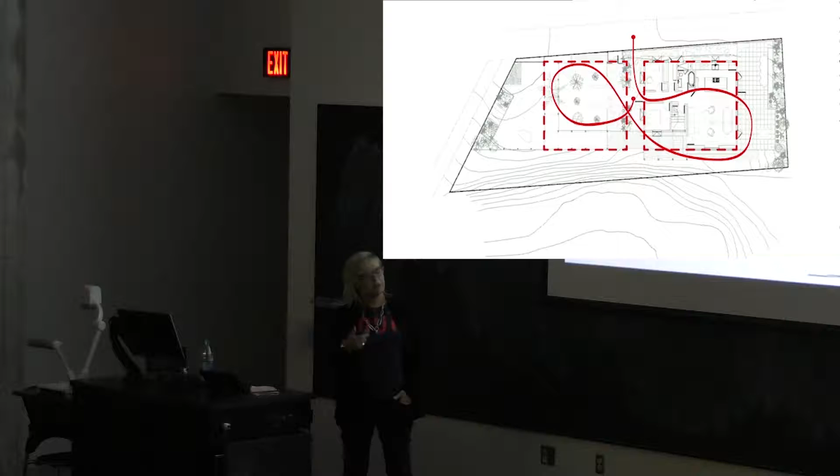That project got published a lot. It was weird, in the end I thought of it as just kind of a side project, but it ended up getting me this book deal to do a book on what I'd call the suppressed narrative of modernism in LA, which to me was these very eccentric endeavors by people like Gregory Ain or Schindler.

Or Neutra, that were a little bit about LA and some of the issues that Todd was talking about, but also about the clientele, which in the neighborhood this book is about, Silverlake, were often people working in the movie business. It was kind of a less segregated area, more politically left.

Anyhow, I think I did this in 2004, and it was a time when people still thought of modern architecture in a more antiseptic way, kind of a glass, steel, Wassily chair kind of way. So I wanted to show this illustration of these other versions of modernism.

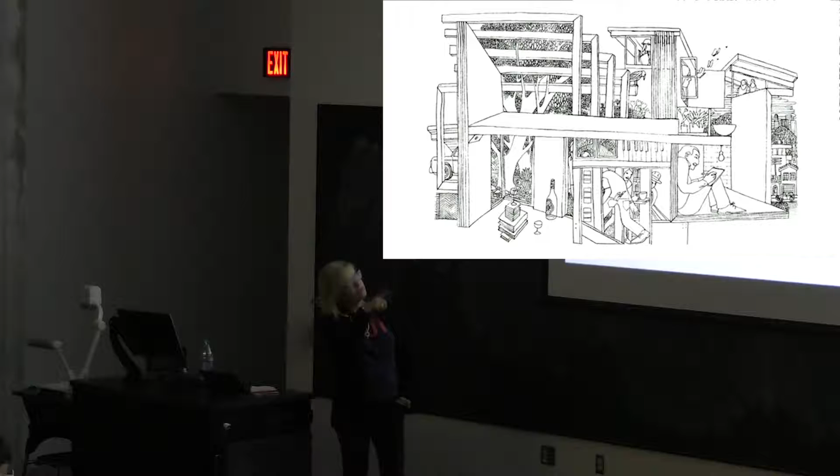A friend of mine, Geoff McFetridge, who's a kind of renowned graphic artist and artist, did illustrations. So this is his illustration of the Schindler chapter. That's Schindler in the corner drawing.

And the book itself was intentionally laid out as a different kind of project than like a Swiss modernist monograph about architecture. So I worked with this guy, Michael Worthington, who's at CalArts, and we developed this sort of graphic language and a more informal way of presenting it.

So all the houses are photographed kind of with the stuff in them as it is, ersatz.

And in a way, that kind of speaks to what has since become an issue for me, which is looking at diverse sources of inspiration. I'm particularly interested in strategies that are two-dimensional strategies like color or text that can add a lot of atmosphere to a building without that much cost.

So it's kind of like a third layer of architecture, and I see things like the history of informal painting on buildings. This is an artist working on a project about that same issue, but kind of the palette of LA as it was when I moved there.

Right now, LA is very influenced by stuff going on in Vietnam and China, but funnily, for LA right now, all the architects, all we ever do is talk about Mexico City. Mexico City is the cool place to be. If you want to go somewhere cool, you can skip LA apparently and go to Mexico City, but there is a kind of new emphasis on color.

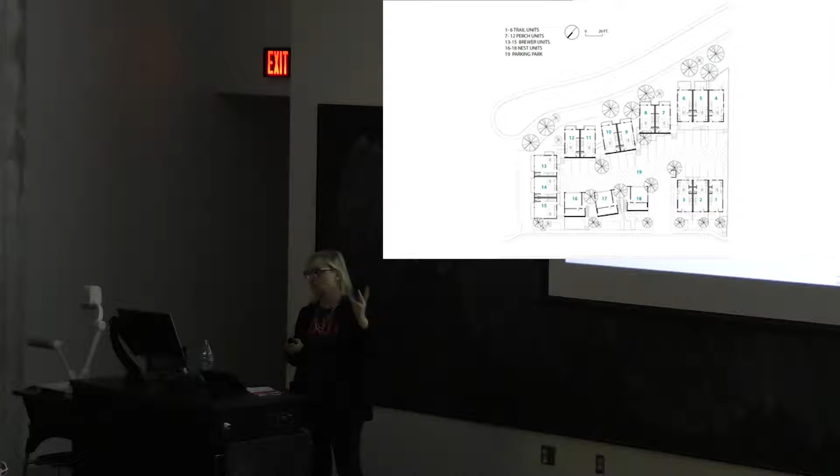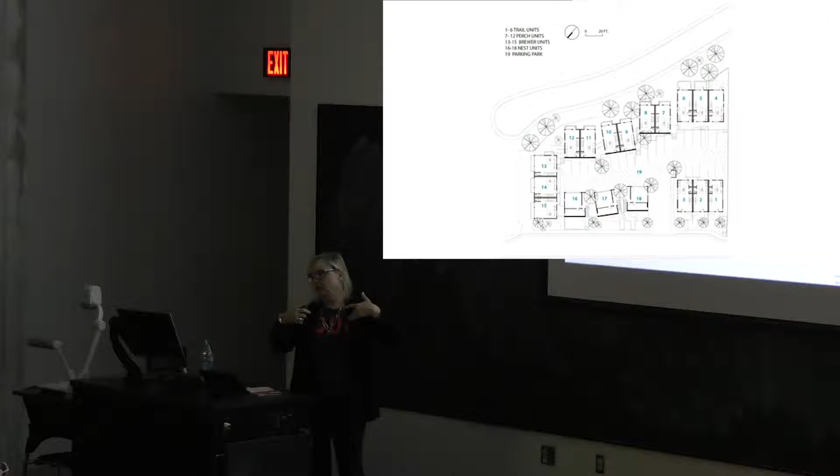I also set it up so that each of these houses—this is 18 individual little houses, sold independently—has about 8 inches of separation between some of the ones pushed together. All of their kitchens look into that parking lot and into the central park, and their primary entrances are all there.

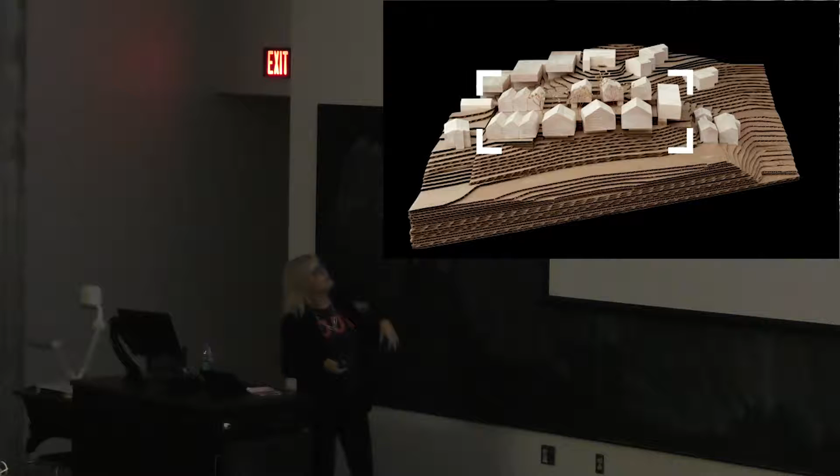So you have this built-in kind of Knots Landing scenario for people my age, and this is the massing of it. There's a tongue-in-cheek thing where often a set of 2 houses looks like one house, and sometimes 3 houses look like 2 houses.

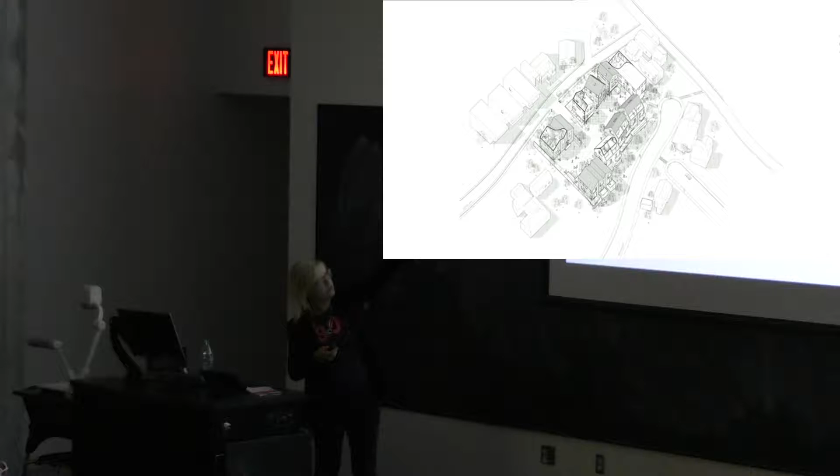And that's where the fun part starts, where there's a sort of graphic formal language that's telling a couple different things. This cutaway shows the arrangement of things. Say this unit is 3 individual houses with a strip that you hopefully can't see that separates them for seismic reasons. This is a section through that.

As we go down, it was a very complicated hillside, so a lot of the houses are embedded in different ways into the hill. These guys each have a different relationship to the parking in back, but they also address the street on the front.

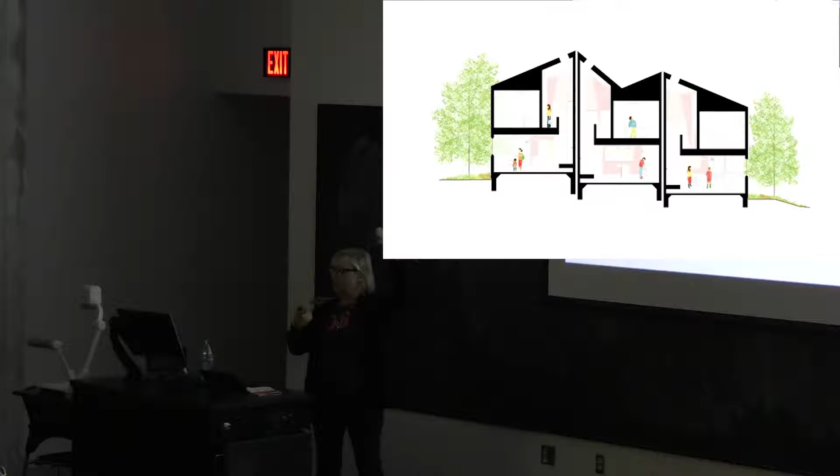One of the ways of making essentially low cost housing units have more architectural quality from the interior is by leaving the ceilings open. So we have exaggerated ceiling heights and pitches, but those are mostly left open so that going up the stairs you have this real sense of a more majestic height, like in this drawing illustration.

That's the parking court. So here's a section. The ones on the lower part are literally embedded in the hill. There's a large concrete retaining wall, and they face out more towards the back.

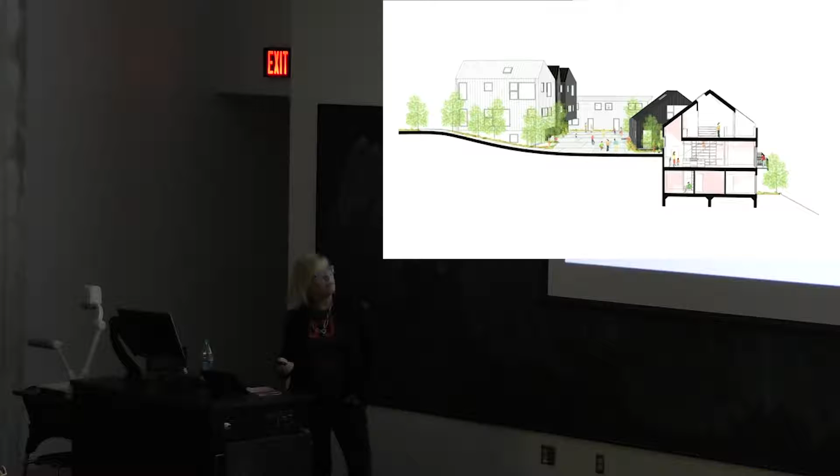And this is the manifestation. My favorite thing that happened, which was my dream in life really, was that the neighbors have all become rather friendly as they are forced through the architect's social engineering. There was a communal dinner party that like 9 of the houses had together, and I got invited by one of the house owners. We took over the parking court, and I can't believe I didn't get a photographer to come, so I just have my bad shots.

But it's interesting, it's been very, very successful. One of them is for sale now, and the prices are going up. This is how it looks from the streetscape. From the neighbor's point of view it has worked out pretty well because it's added to the texture of the neighborhood. We really did study the massing of the existing houses in Echo Park and match them.

This is a project I'm just showing, kind of funny. I did this maybe 10 years ago, a coffee shop for one of the first third wave coffee companies coming to LA, Intelligentsia Coffee, and it was their flagship. I had just been to Turkey and was really interested in tile, and I got into this idea of creating a sort of tile runway from the street up into this place that would gather people together and also provide the graphic signage.

On the top of it, you have an old world tile thing on top, a kind of Donald Judd box, and the barista has a lowered counter that becomes the theatrical setting between the customer and the fancy coffee.

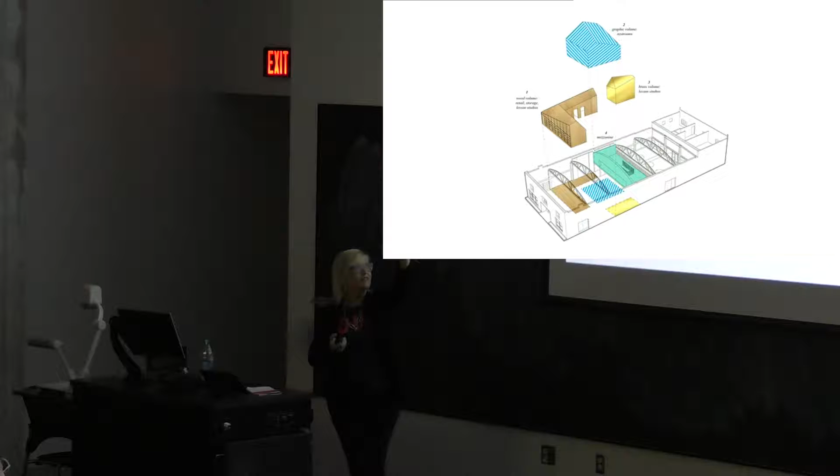So it's a kind of multiple groups and communities overlapping in the space. I have a little video of the walkthrough of the inside.

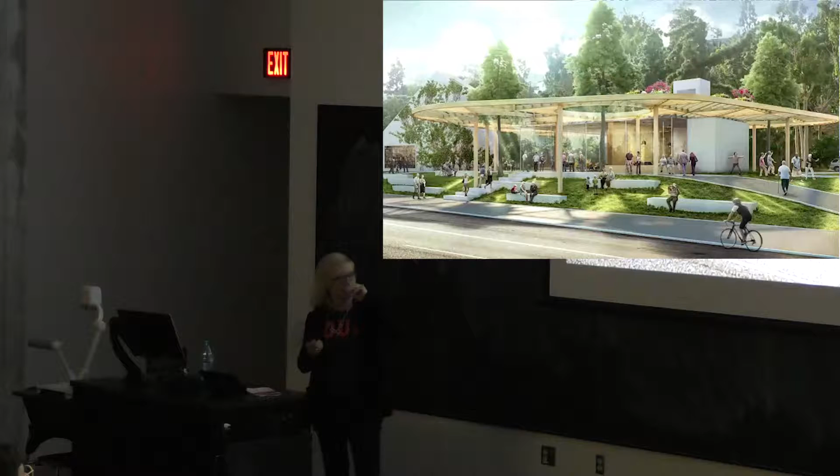That we're using for fundraising for them. So we were making a multi-purpose space and then a kind of extended porch onto the main street that becomes like a porch for the seniors to sit on, but also for kind of interaction. There's a couple of kids' parks and soccer fields around there, so it becomes sort of like a public zone in the city that can also double as a rental function.

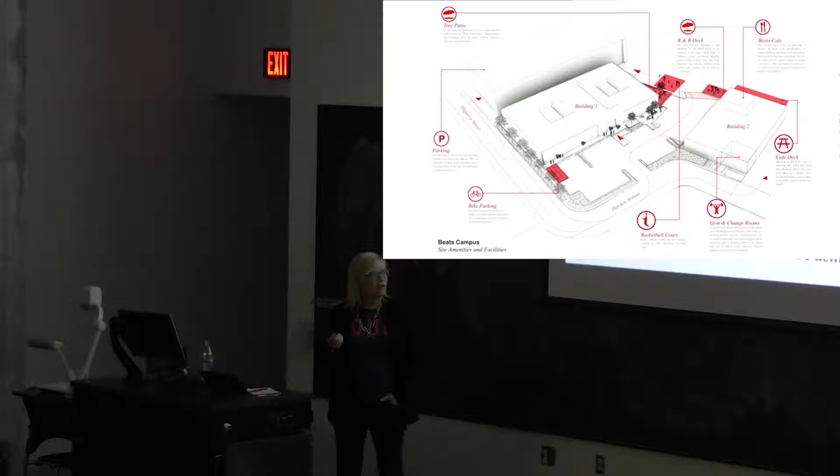A different kind of urbanism is some stuff that we've been doing - a fair amount of these large tenant improvement, sort of tech campus projects lately, and this is one for Beats By Dre Headphones, which is now Apple Music, or owned by Apple Music. And this was a two-story typewriter warehouse in Culver City, right near Eric Owen Moss's territory. And we were kitty corner from his office, actually.

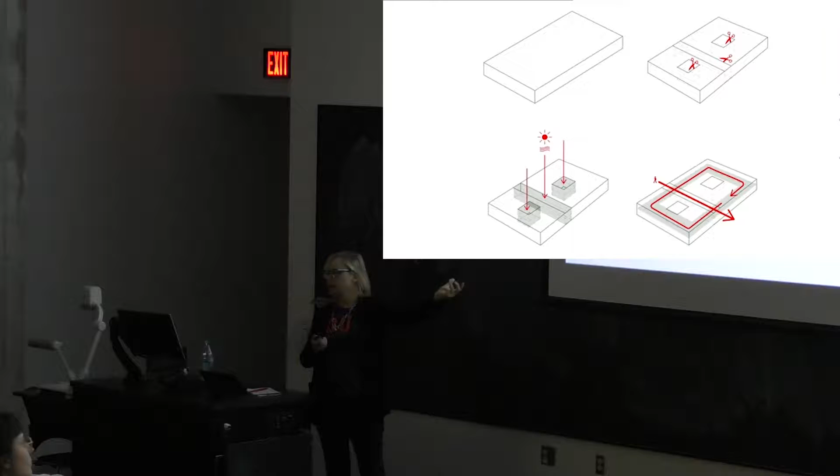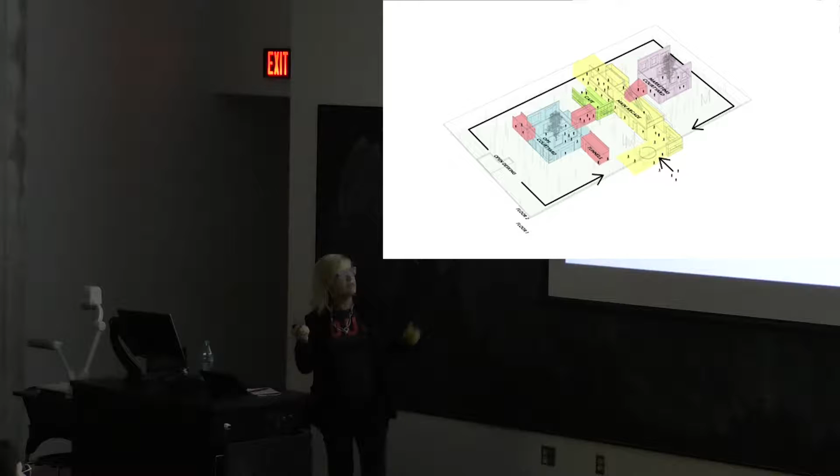So what we did, we sort of took this existing building, we cut two big atrium spaces and one long corridor through the middle, creating kind of these different sources of light. It had a very low ceiling, floor to floor plates, but we were trying to create pieces of expansion and also a language that was sort of about Beats.

So like here in the lobby, these are red Beats cords, which is their sort of signature headphone cord, kind of tied around the columns. There's a hilarious amount of columns in this building that are not on any grid, and unfortunately we were not allowed to remove any because this whole area of Culver City is built on fill next to a creek - basically if you take a column out, you're building like a 100-foot caisson each time. So you don't take any columns, you just wrap them in red cords.

So this is that main street which connects the parking garage for the employees on one end and the main lobby on the other, and was intentionally done as a sort of dramatic museum stair kind of, so that it was this public space that would really try connecting the upper floor and the lower floor.

On the left is a lot of mirrored stainless steel and a boardroom and a cafe that is kind of placed so that it becomes a check-in place for everybody coming from the parking garage, and also sort of during the day a hangout space.

And then one of the atriums is organized for the people who are running the ops department. This is the thing when you're doing - this is a campus for about 500 people, 600 people. You have many different groups. You have engineers, marketing people, ops people, kind of different lifestyles and work styles. And so within each area, there are some different kinds of smaller scale difference.

But on a larger scale, this group are the people who move shipping containers around at midnight, our midnight in the South Seas, and they're on a kind of weird schedule. They wanted a very calm, almost library-like sort of atmosphere, and the blueness in some of the furniture in here became that space. We had built out all the skylights that are in here.

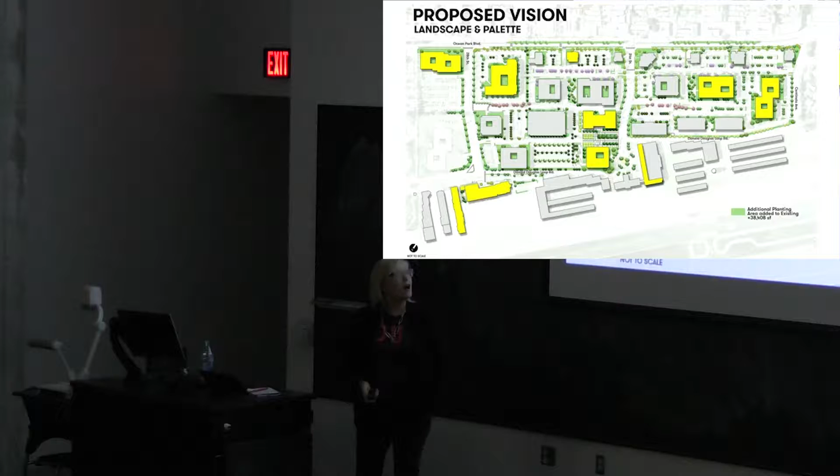Another campus we've been working on a lot of buildings for is Snapchat in Santa Monica, who are moving from Venice. We've been working very quickly going through these existing buildings and changing them. This one used to be the Museum of Flying in Santa Monica.

We developed this palette and language that had to do with bringing nature in. This building is defined by some really big chunks of space that don't have windows, though they have some indirect light. So I was looking to use a language with wood, leafy graphics we made, and different materials of fabric that look like sisal, although it's not.

We created a couple of these freestanding structures — there are two big warehouse volumes that become like an informal meeting area inside.

So something like this, a lot of these windows have been covered, and we opened everything up, and that's one of our free-form meeting rooms. There's a lot of informal meeting space.

Again, you're kind of almost doing urban design when you do projects like this, because this is probably 200 people in here, so different kinds of spaces for different kinds of work and activity, but also different kinds of people. This is like a waiting room for the HR department for people being interviewed.

We used some of the snap yellow very sparingly to highlight the structure in the building. That's sort of before they moved in.

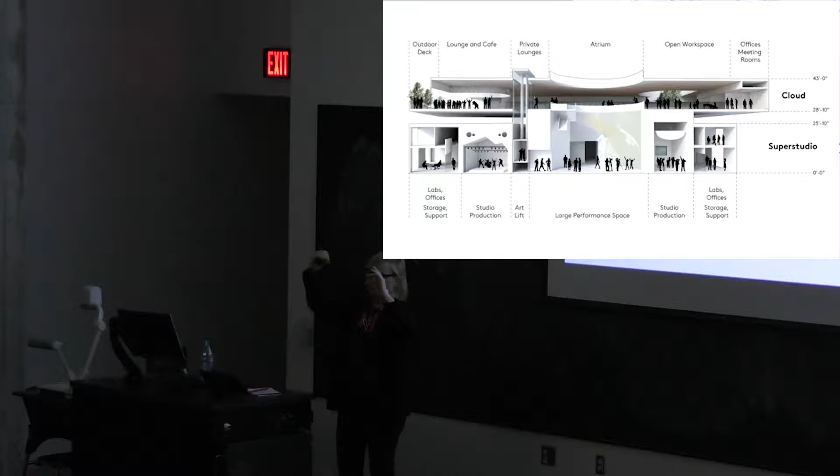Here's another concept project for a part of Apple, a media thing where there's a warehouse below that we're stuffing with a lot of their programs for performance and recording, and then designing a place above it for artists and people working there. You'd kind of think of it as a Superstudio, like a whole movie studio compressed into a box, and above it you go in and out depending on what you're doing below.

On a totally different thing, again kind of in the California-as-home-of-technology-and-design vein, which is a big thing going on in California — this is a Lautner house called Silvertop that I was working on for about 3 years and just finished recently. It's this amazing house built around these infrastructural principles.

Lautner was working with his client Reiner, who was a manufacturer of metal clips during World War II, and later turned that into a hair clip business after the war, making a lot of money in clips. He wanted to use the house as a kind of research project — he even had a big fight with the tax bureau about whether he could write off the whole house as a research project. They were looking at it like a house-of-the-future project.

There's an 85-foot concrete shell span — this was the first concrete shell Lautner did. They'd gone to look at Nervi's Olympic Stadium, and they'd looked at projects in Uruguay, doing a lot of homework on how to start using these new infrastructural technologies.

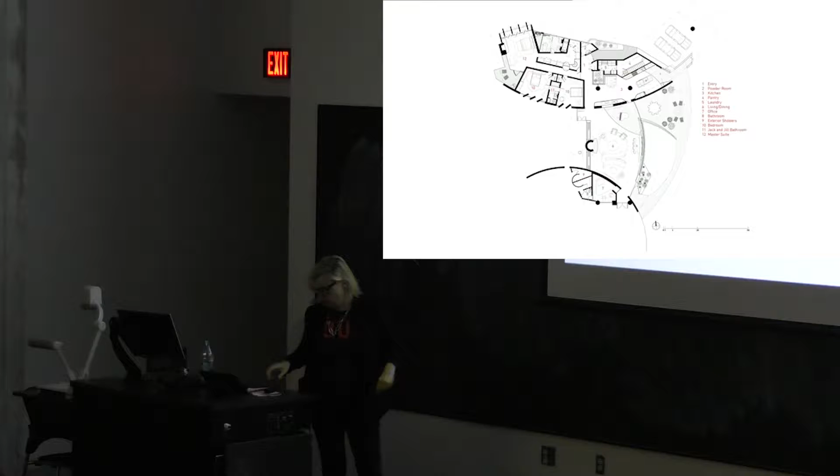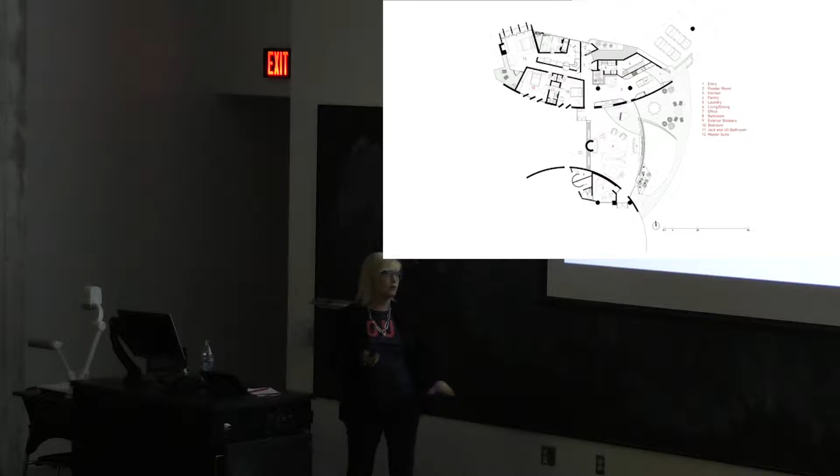The house was never finished. It was abandoned around 1965 because Reiner ran out of money, then sold in the early 70s to a couple who moved in and patched up some stuff, but it had never really been completely finished. My client bought it from those people.

My client is also from the tech world and wanted to add a whole layer of technology under the existing visible technology. So what we ended up doing was creating a lot of analog interfaces or user experience moments, with a pretty big digital background stored in the conveniently complicated tunnels that go underneath this house.

Part of what we did was make some of the technology work better. A lot of the machines had been built in a way that made sense in 1960, but the motors and stuff weren't up to snuff.

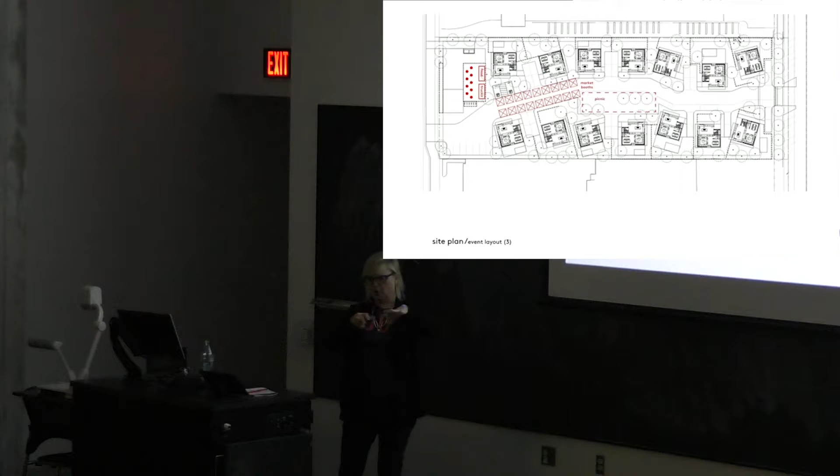While in Palm Springs, I've been working on a project nearby, which is a kind of weird new hotel based on the concept of Airbnb, where you rent a 5 or 6 bedroom villa as your room. So you create a vertical Palm Springs hacienda, condensed, verticalized, with pools either in the back or on the roof. It's organized along an interior street, slightly related to Blackbird's, but something where you could use the whole thing as a wedding, or you could have the farmer's market there.

So this is the overall view of it. Each of these structures is an independent room that you would rent, and there's probably shutting down Airbnb in Palm Springs soon—people get mad about people renting, like 20 people going to Coachella renting a house in the spread out residential neighborhood. So the idea was to take that kind of strategy and turn it into something different. There's pools on the roof and so on.

And then this, I think while I was in Palm Springs so much, I was looking a lot at Albert Frey and thinking about California modernism and its formal vocabulary.

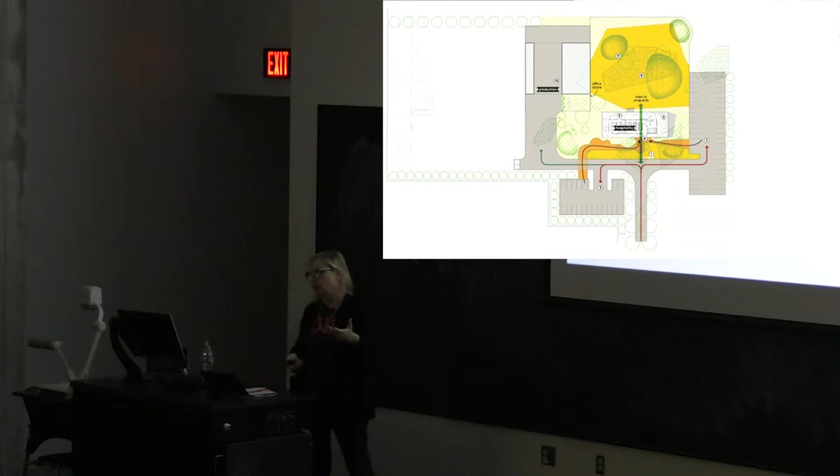We were given both the landscape commission and the architecture. A big part of it is the production place, which has to be a relatively inexpensive thing, but there's a big chunk of production. And then there's also hospitality, which is where all the sales and the kind of income of the winery is driven. This is our plan realized.

On the left is the production zone and our hospitality space, and then the landscape that we built around it as well. This is also slightly set back from the main highway in Napa, so in a way the building had to act as a sign for itself. You can't really do regular signage in Napa due to restrictions, so the building had to be more Venturian than your average building in terms of speaking to the passersby.

This is a hospitality zone inside the production space. And then the main hospitality building is a very simple structure, almost like an expanded living room, with a shade structure over it that acts as that sign. The shade structure is perforated. It does get incredibly hot in Napa, so we've created this shade zone outside.